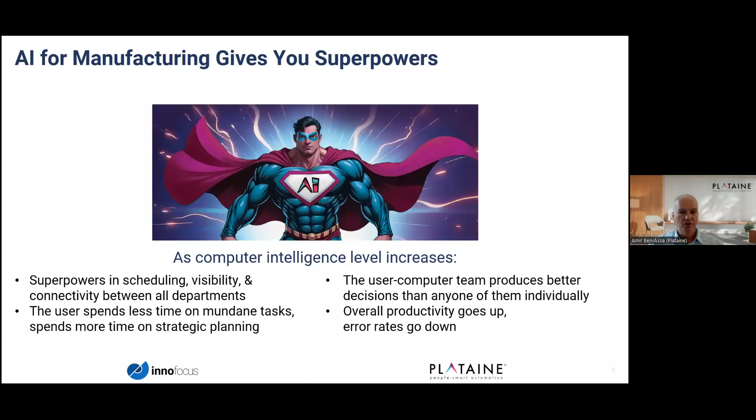So the InnoFocus and Plataine vision is to have a holistic approach. It means that systems should be connected, and basically data should flow from one system to another, and the processes should be automated. If we're talking about different personas in the factory, everyone should look at connected systems when they're making their decisions about planning and scheduling. It should be connected to the ERP and to the demand and to the work orders being received in the ERP. Later on, the tooling manager needs to also plan for the different service cycles and the availability of the different tools, molds and jigs. Otherwise, we will have some production disruptions.

When we're talking about material, thawing material, taking it from the freezer and putting it out for defrost is also important, and making sure you're ready for the production day with your pick list and everything. Not to mention the quality manager, and also optimization programs and process engineering that need those insights. The idea is that everything is connected now with the cloud, whether this is public cloud, or a more secured government cloud or private cloud, and we support everything. So basically it's a great enabler for making sure all those systems and all those people are connected. Whenever you are making a new plan, the tooling manager can be informed, and the material manager, and the quality manager, and so on and so forth.

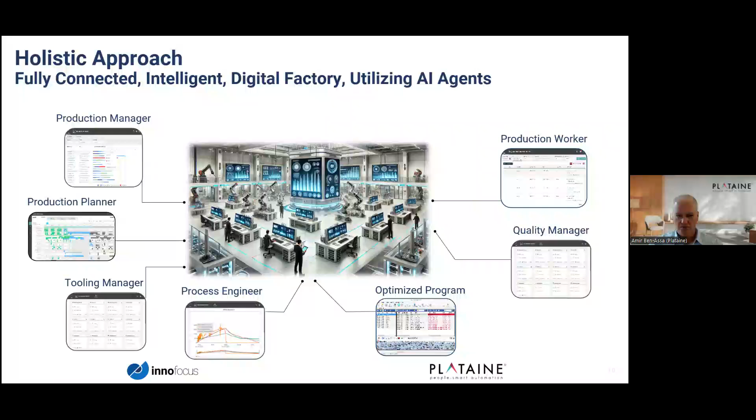Thank you, Joachim. So basically, the first example I'd like to share is planning and scheduling. Planning and scheduling is at the heart of every manufacturing factory. You might think there's so much complexity when talking about aerostructures and composites and other high quality parts from lightweight material, but over the years we've managed to handle that complexity. Right now we have many customers that, on a weekly basis, within a push of a button — and in some cases it's more automated than that — can create very accurate plans that are valid and optimal.

Now, when you think about it, you have to consider so many parameters, starting from the process flow and continuing with the number of shifts, available machines and tools, material, and the people involved in the production line. And we do all of that, at very high scale.

We're able to schedule automatically tens of thousands of different tasks, as you can see on the Gantt. Some of our customers are doing it on a weekly basis.

Some of our customers are doing it even 3 months in advance, just to make sure they have their plan. This plan will be changed, of course, but at least they are prepared for it.

Now, what I mentioned about AI, this is the beauty of it. It means that whatever takes a very experienced person 3 or 4 days to do...

and putting out fires, because every time the factory floor is changing, you can have a great plan, but come Monday or Tuesday morning, 2 people are sick, or one machine needs maintenance, or a bagging operation is late.

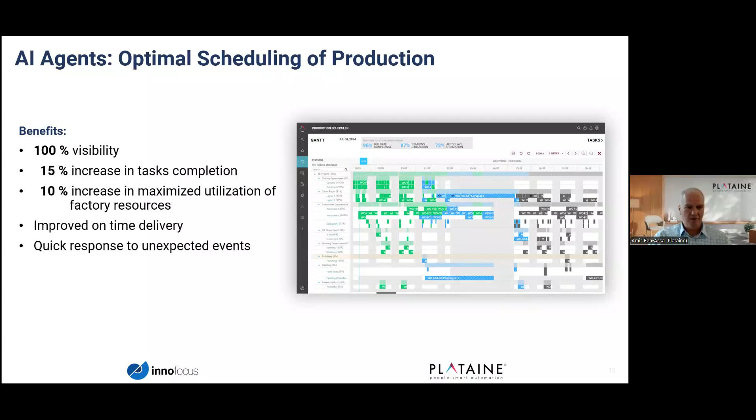Another example is controlling and managing hundreds and thousands of materials. They could be rolls, spools for our AFP machines, resins, whatever it is.

Why waste time keeping track with notes or Excel, or doing manual things, when today there are automated systems that can do it for you?

So this is the idea: to handle everything that is out of the freezer into the freezer, the shelf life, the time - all the quality parameters are handled in the cloud, online, digitally, and you don't have to do anything.

You can focus on the manufacturing tasks themselves. As the process goes, we are building what we call the digital passport.

So you start with some material, and then you can cut it, and you have kits, and then you're doing the layup process and autoclave curing, but everything accumulates to the digital passport for the specific part or project.

And it could also be spools that are placed in the AFP machines, and this is turned into a product. So whatever the manufacturing technology is, for quality reasons and to save a lot of time...

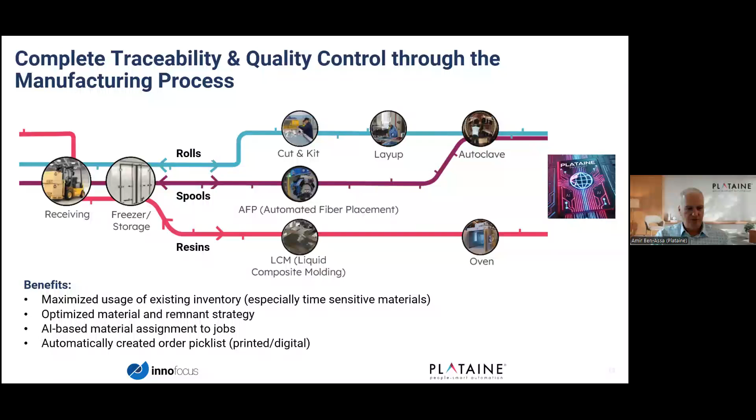we are keeping those digital records, and it's very useful. Another example is around cutting and kitting.

Of course, today we have to make use of our short rolls. We have to make use of all of the materials that we have.

And whether you are using Lectra or Eastman or Zund, or sometimes factories use multiple machines for their own reasons and efficiency, we are agnostic to that, and we can provide automated plans.

To make sure that the entire cutting and kitting process is fully automated and efficient. And in the end of the day, it's important that the projects are cut on time.

It's important to reduce the waste, because not only is this material expensive, but now we talked about the aspect of sustainability. So we have to make sure that we cut down dramatically the waste.

Both from a cost perspective, but also from environmental reasons. And that solution gives you great cut plans that are optimized, dense, and take over the burden of making sure that you are always making the right plan.

The system will take care of this for you, and is the best co-pilot or the best digital assistant for the cutting and kitting stuff.

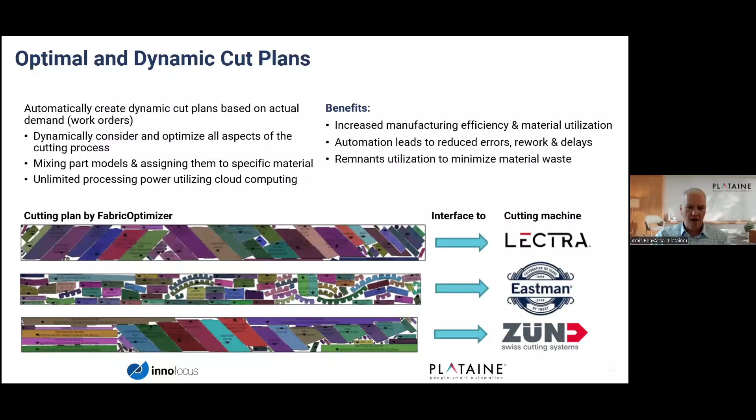So I will continue to show what are the critical steps for a fully connected, intelligent, as well as digital factory. So that is more or less a short summary.

As mentioned before, you need to collect the data from machines, sensors, in real time. Then you have the chance to analyze it first by your personal brain, and later on with AI.

You are able to optimize and automate things, which will simplify your personal work, so that you have the chance to focus on other subjects which have a higher priority.

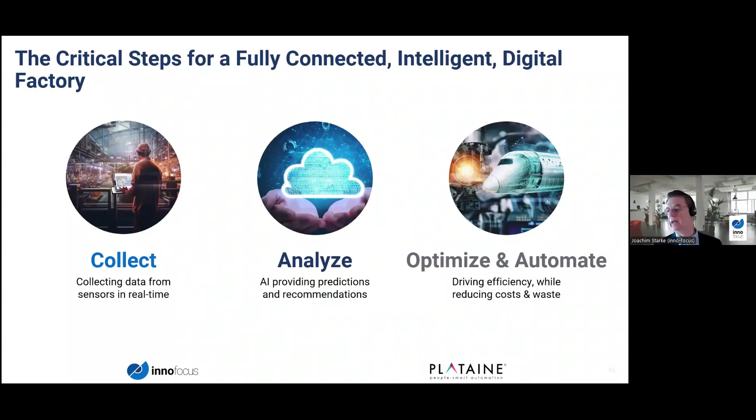And that I will show you in the next steps, in the next slides, for a multi-stage process chain, how we operate there and how we created our tool. First, we start with the elements of the real world. We create the process chain of a typical representative product for that. We implement the data sources along the process chain.

If we have that, we are able to generate real data from the machine and bring them to a platform. With that, we are able to visualize and analyze these at that stage, manual evaluation and manual optimization of process or other objects. Then you start to focus on what can be optimized, what should be possible by that, what I have seen, what I have identified. But that is a complete new approach in opposite to that manual visualization and manual analysis.

So as mentioned before, you collect data for the digital shadow, you bring that to the analyze system, and then you start to use that information for the automatic optimization and bring back the information as well to the platform. With that, you collect everything and you can create, like Amir mentioned, a digital passport, the digital twin for each part.

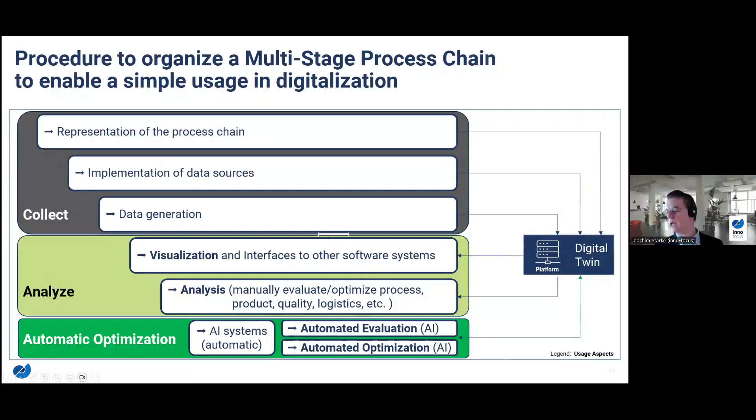In the next slide, I show you how we handle this. We have our tool, the Process Data Analyzer, and it represents first in that swim lane all the process chain, beside of that quality and logistic aspects.

With that swim lane, you are able also to get a structure, and you add more information like which machine is it, and as well some aspects from the data sources and from the IT structure which is behind that. In this point, we also have what is usable, often used, a switch if you have an alternative process route, or even if you bring that part to another partner, to another company.

So that is also possible, and it means we have also integrated a cross-company process possibility. In the result, you have a document which shows the entire real as well as the digital system. This gives both parties, the OT for the real and the IT persons, a clear overview, well structured horizontally as well as along the process chain in a vertical meaning.

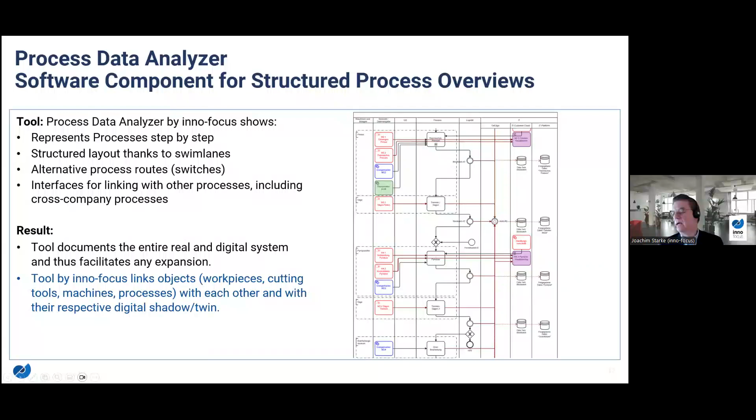Coming to the visualization, if I would click on one of the elements, I see the result for a certain object, in this case a workpiece, from the machinery, and all the data from the machinery are visualized in a graph, much easier than the collected data, which are in a long table of around one million rows where all the data are collected.

And we prepare that in a standardized graph set for this case. It is an oven from the area of high temperature processing. Everything is prepared, a clear view, what is possible, and you can use that as a flexible screen because a zoom in time is possible as well, a zoom for the data itself. So in the same screen, you are able at the same time to go much more in detail. And if there are too many sensor data, it is clear that we add a different and further chart.

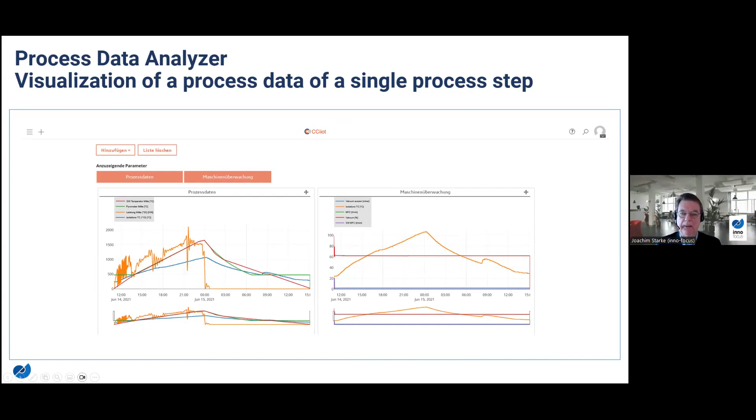The second aspect, beside all kinds of visualization, is the traceability of the part, which is shown here in this slide, similar to what Amir presented before. For one part, it is shown whether the process is completed, ongoing, or, in this case, it has a delay. Here we are able to bring in more information. We are also able to assume or predict when the process is finished and when the part will be able to be received for the next process step.

That means with that tool, you are able to have a look in detail for a short period of time, what is real time, what is possible. The second aspect is for historical investigation, you are able to look at which stations, which machines that part has passed, and that is interesting in case of some quality issues. You are able to look at that part to identify a possible mistake, and you are as well able to look at the part before or after that, and compare what happened there.

As well, and clear to understand, with interfaces, you bring also the planning tools in connection from IoT with the direct connection to the real situation on the shop floor itself. So you are able to react with these programs, these software modules, quite quicker than in the past where it was only a planning tool. So it becomes nowadays, with quick information, a real-time tool.

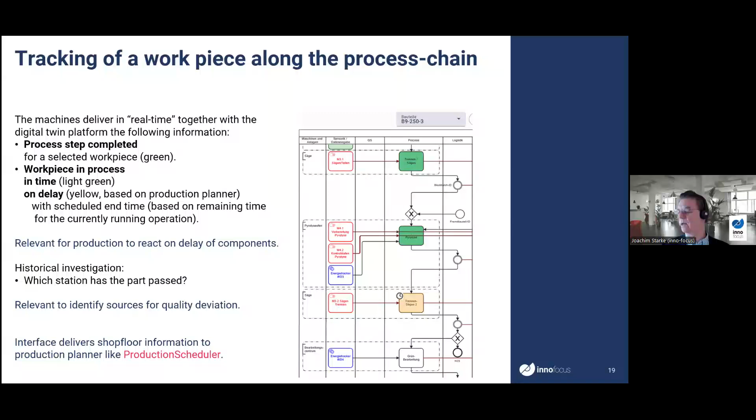In the next step, coming to a machining analyzing system, you want to look at several parts, and this we have solved with a machining analyzer, where you can select the part or parts, the work pieces you want from a table, and you can also select from the various sensors the various information you get from these sensors, in this field, what you will show, what you want to visualize.

In this case, we have a milling process. You see the path of the tool center point of your cutting tool with the additional information of one of the sensor signals with a colored range. Further information is this sensor itself and the power of the spindle as a third graph. And this is quite interesting - that is the programming information which happened at this time in the machine.

So you have a direct connection from the program to its answers, to its results. And by the black point, each of the three or four diagrams in this case are connected, and it moves if you hover over that diagram and go along this path, and you identify where, at what point, happened what. So that is one of the USPs - all data displayed in a linked format.

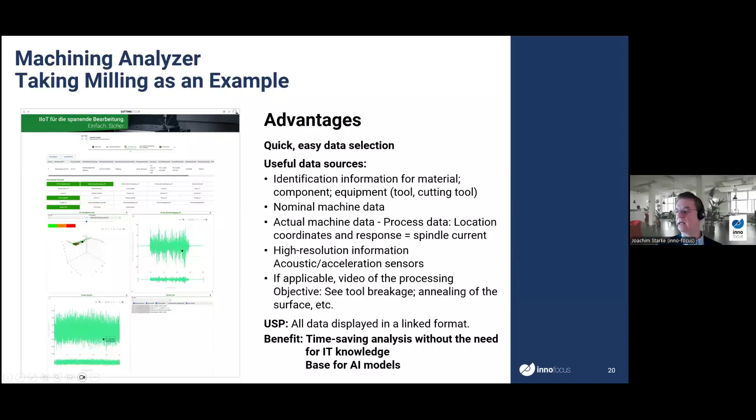And after that, I want again to pass to Amir to continue with the presentation.

So we brought a couple of case studies just to provide you with real-life examples of how this is done and what customers like you can achieve. Basically, our first example is from the US - ST Engineering, Middle River, is a factory producing nacelles and other parts for jet engines from carbon fiber.

Basically, it was quite an advanced but typical manufacturing site where they were using, on one hand, advanced technologies, and on the other hand, a lot of paper in some of their processes and Excel in other cases. A few years ago, they set a goal to automate the processes, digitize the processes, and move all the paper to the cloud and to a digital format, so they could be much more efficient and respond to the increase in demand for jet engines and aircraft.

Basically, we see here tremendous results of automation that led to a 10% improvement in material usage and efficiency, 96% first-time-right, taking down all the rework and quality problems they used to have because of manual errors and other reasons, end-to-end time-sensitive material management, over 90% utilization of carbon fiber materials, which is amazing, and an 80% reduction in material waste.

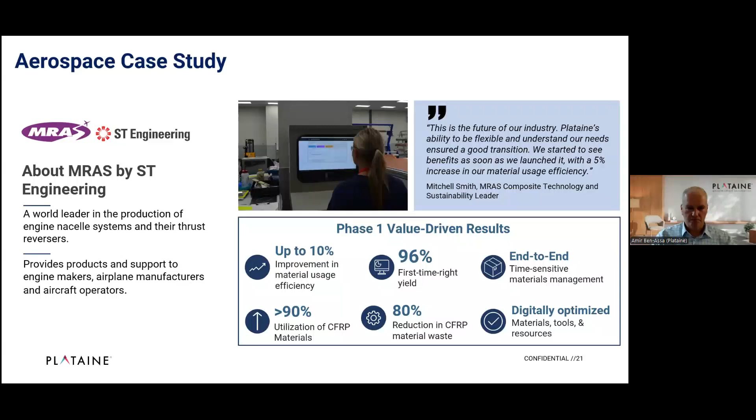With Multiply, it's all around planning and scheduling that is done today automatically. They have a 3-month schedule at every point in time, and our system automatically schedules their plan in a very detailed and optimized manner.

It enabled them to grow and expand the number of parts they can commit and produce without hiring more people or buying new machines, and basically made them more agile and quick to respond to changes and rush orders.

In the past, it took them a few days to come up with the plan; today it's done automatically, allowing them to focus on what really matters in daily production. Previously, responding to a change took 4 to 5 hours and caused delays. Now they are very agile, able to quickly respond to any change on the production floor and adjust, making sure their due date compliance is much better.

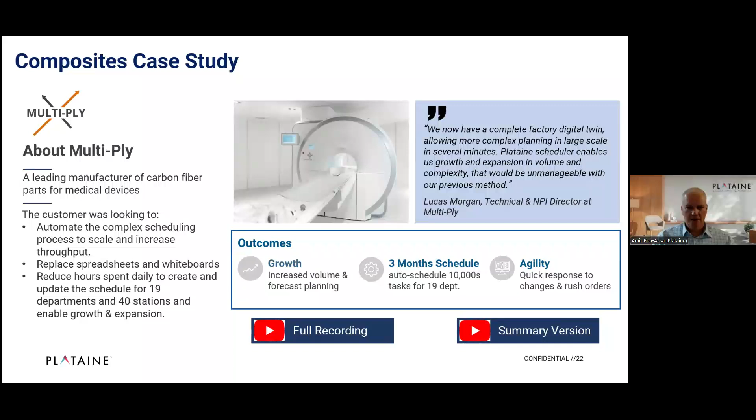We had a webinar recently with Mr. Lucas Morgan. You have here some links if you want the slides and presentation for the complete webinar, or there's a short video of around 10 minutes that briefly goes over the important aspects.

So to summarize our presentation before we move on to the Q&A session, we've touched today on a lot of challenges in the industry, but also showed a lot of tools coming from inno-focus and from Plataine, together with the great services that inno-focus can provide.

When dealing with these things, we believe you must take a holistic approach. In the past, we would identify a problem and say that's a point solution that could solve it. But today, where everything is connected and information flows so rapidly, you have to think holistically. How do you connect the different machines and sensors into your decision-making and supporting system? How is the ERP and MES connected to what the planners, operators, and managers are doing day-to-day? How does material influence the tools, the work orders, and so on?

Another critical aspect we've talked about is moving from being reactive to being predictive. It means basically that your providers are going to increase rates in the coming months or years. How do you plan for that? How do you plan for a shortage in a certain material and prioritize other work orders that you can process today? How do you do all those things while still keeping up production?